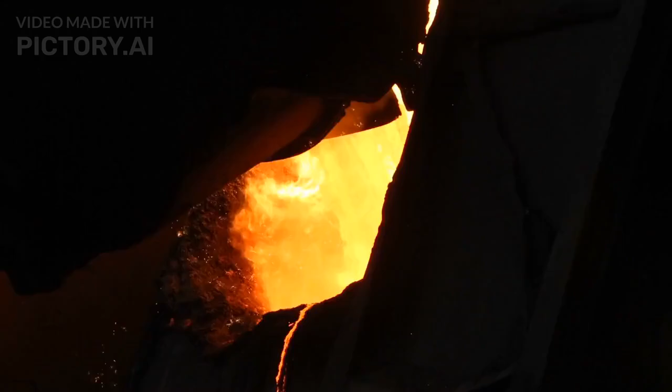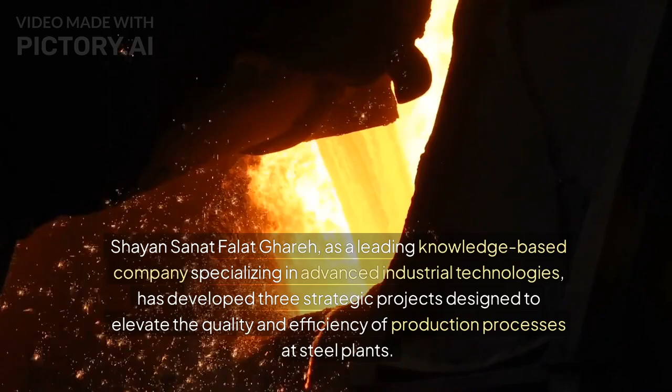Technological projects by Shayan Sanat Falat Ghareh for enhancing production quality and efficiency at steel plants. Shayan Sanat Falat Ghareh, as a leading knowledge-based company specializing in advanced industrial technologies, has developed 3 strategic projects designed to elevate the quality and efficiency of production processes at steel plants.

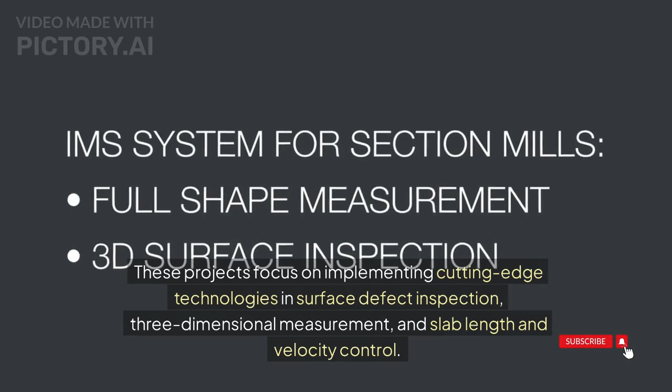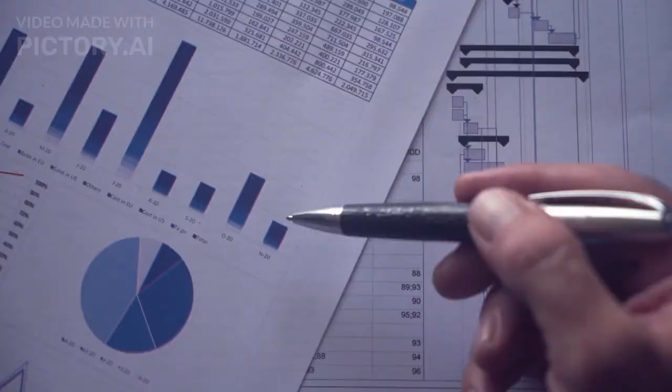These projects focus on implementing cutting-edge technologies in surface defect inspection, 3-dimensional measurement, and slab length and velocity control. Each initiative aims to significantly reduce waste, enhance production workflows, and ensure top-quality output. Below is an in-depth overview of these projects, their objectives, key equipment, and expected outcomes.

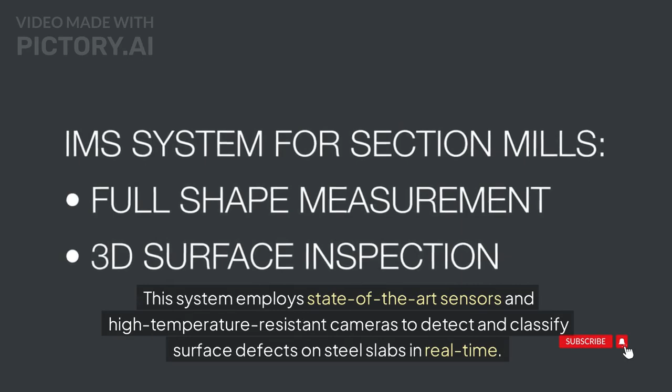1. Surface Defect Inspection System for Steel Slabs. This system employs state-of-the-art sensors and high-temperature resistant cameras to detect and classify surface defects on steel slabs in real time. The system ensures the immediate identification of longitudinal and transverse cracks, grooves, and other surface irregularities, with results seamlessly transmitted to the control room for prompt action.

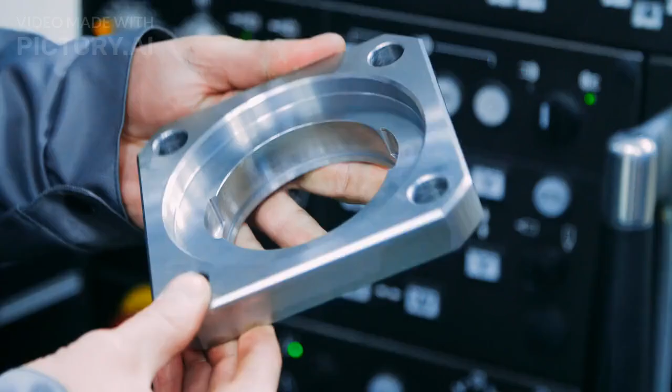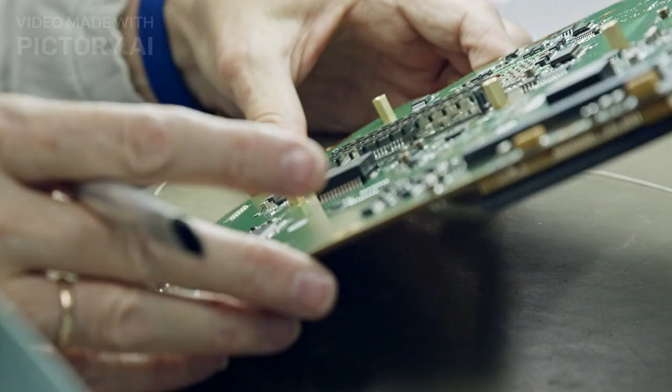Key equipment: high-temperature cameras capable of operating at temperatures up to 1300 degrees Celsius. Specialized defect detection sensors. Advanced image processing software for defect identification and classification. Key advantages: enhanced accuracy in identifying surface defects, even under challenging conditions.

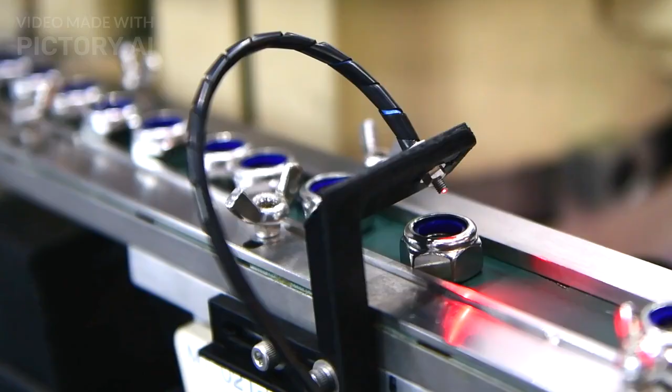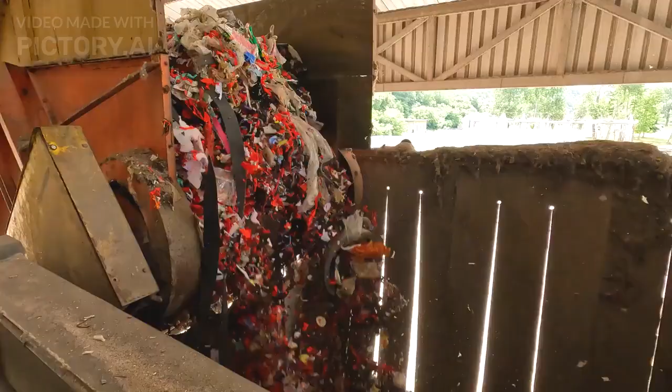Automated detection, minimizing the risk of human error. Comprehensive data storage for generating quality control reports and defect trend analysis. Reduction in production waste and costs associated with defective products.

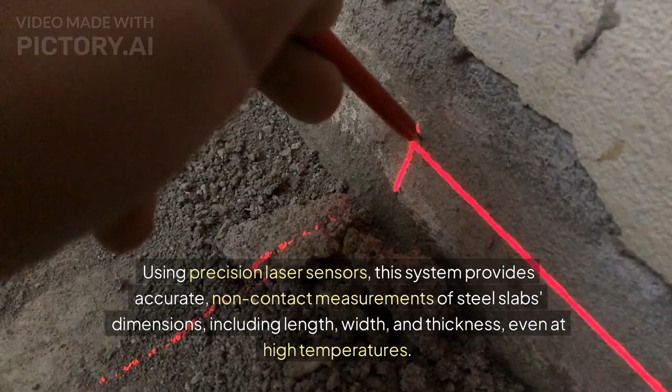2. 3-dimensional measurement system for produced slabs using precision laser sensors. This system provides accurate, non-contact measurements of steel slabs' dimensions, including length, width, and thickness, even at high temperatures. The data integrates directly into the production control system for real-time optimization.

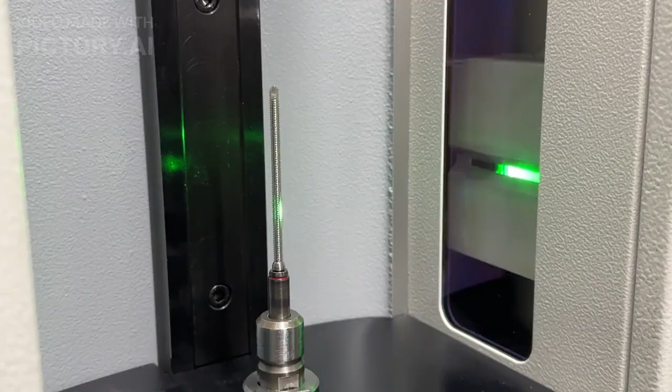Key equipment: high-precision 3D laser sensors for dimensional analysis. Laser scanners designed to withstand high-temperature environments. Data processing software for real-time analysis and integration with control systems.

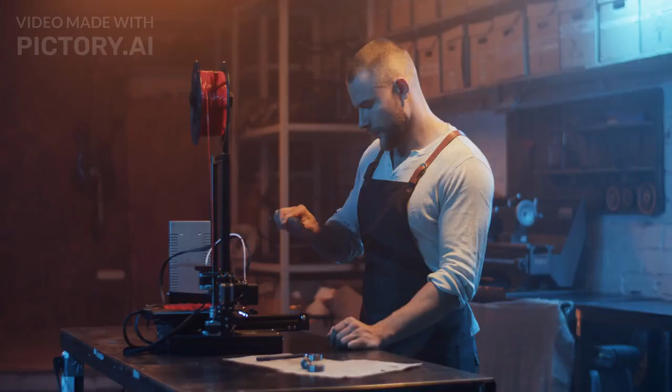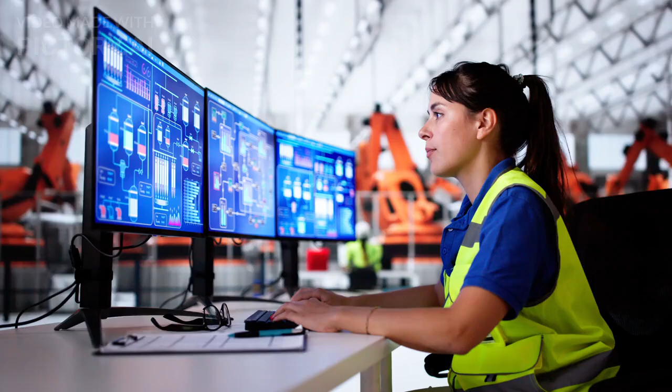Key advantages: reliable dimensional measurements under extreme conditions. Reduction in material waste and rework by ensuring dimensional accuracy. Seamless integration with existing production monitoring systems. Improved efficiency in quality assurance processes.

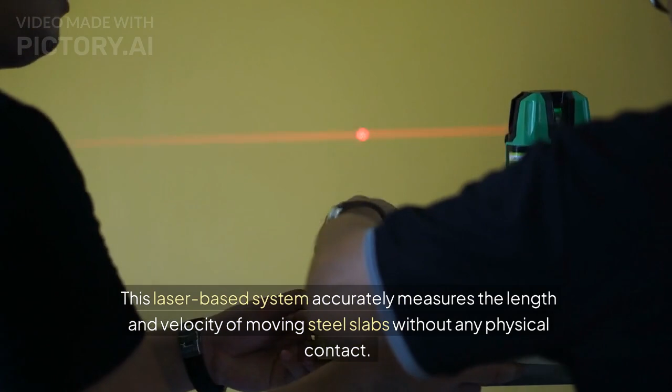3. Slab length and velocity measurement system. This laser-based system accurately measures the length and velocity of moving steel slabs without any physical contact. It delivers precise, real-time data to the control room, allowing for immediate adjustments and optimization.

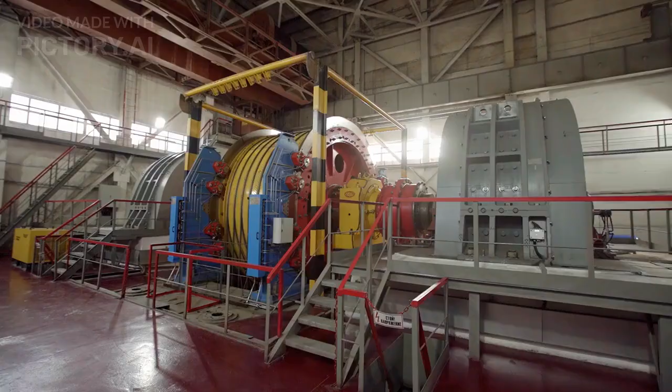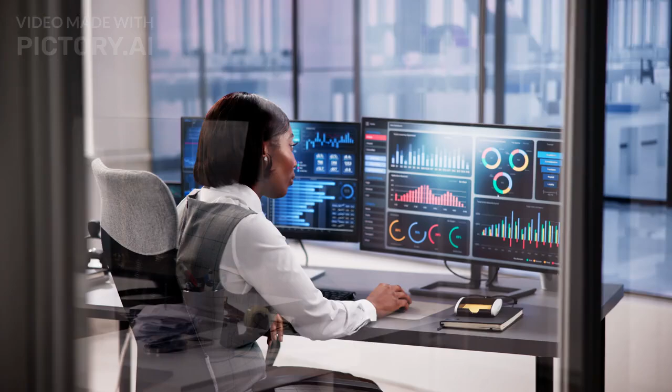Key equipment: long-range laser sensors capable of maintaining accuracy at high temperatures. Thermal management systems to ensure consistent sensor performance. Data analysis software for real-time monitoring and reporting.

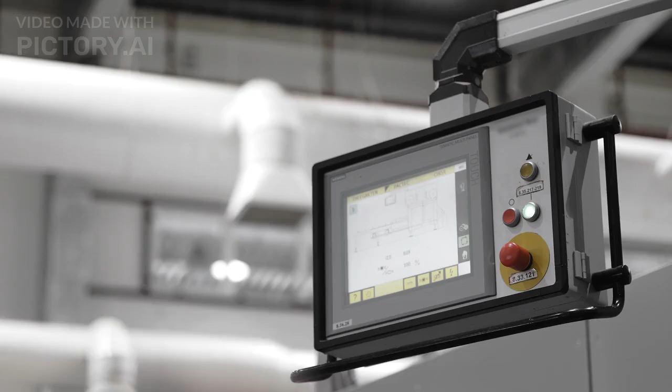Key advantages: accurate tracking of slab dimensions and movement speeds. Enhanced process control through integration with production monitoring systems. Reduction in production downtime and material losses.

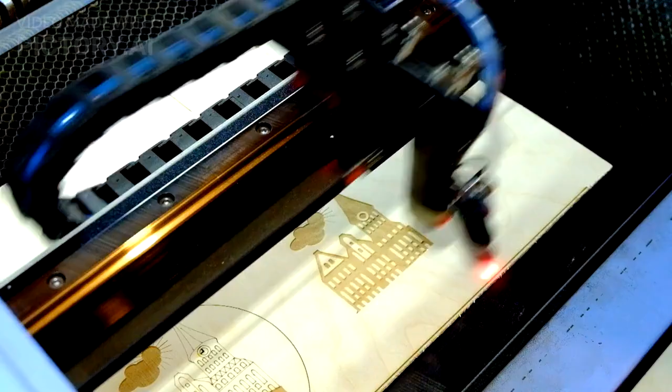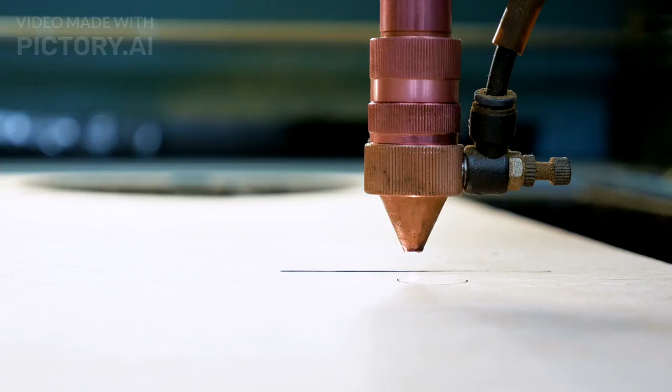Integrated benefits: these systems are designed to work independently or as an integrated package. They are compatible with optical character recognition (OCR) technologies, enabling comprehensive tracking and documentation of surface defects, dimensions, length, and velocity. The implementation of these systems ensures optimized production workflows, reduced operational costs, higher quality end products, and improved compliance with international standards.

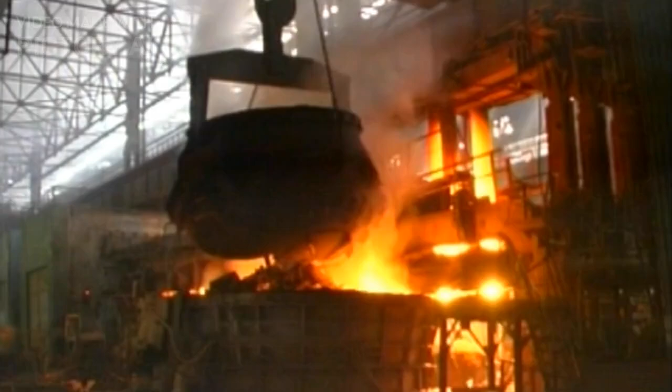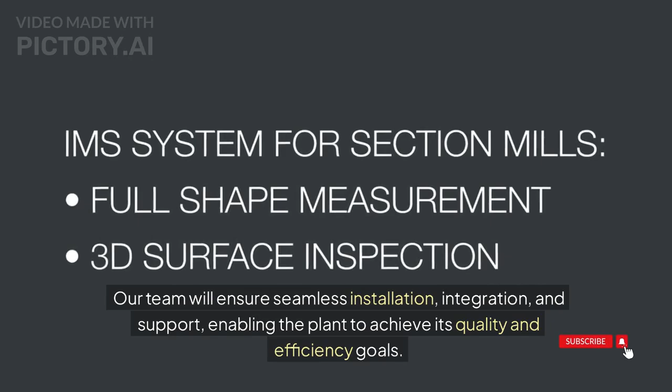Proposal for execution: Shayan Sanat Falat Ghareh is fully equipped to execute these projects with precision and efficiency. These systems can be tailored to meet the specific requirements of different production segments in steel plants. Our team will ensure seamless installation, integration, and support, enabling the plant to achieve its quality and efficiency goals.

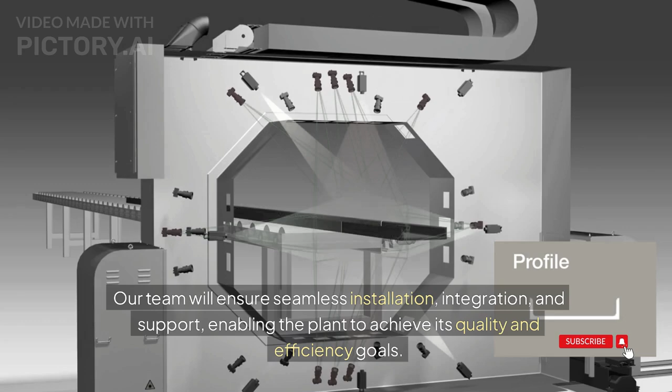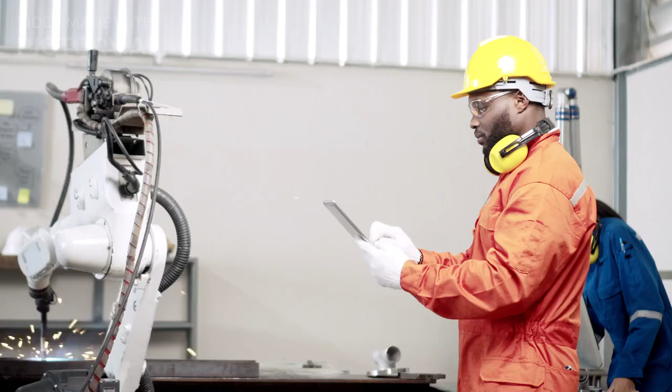Shayan Sanat Falat Ghareh remains committed to driving technological advancements in the steel industry and looks forward to partnering with steel plants to achieve these transformative outcomes.